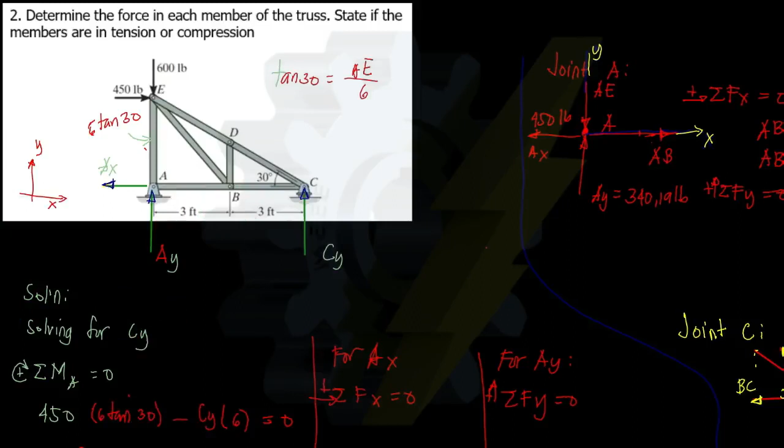So 6 tangent 30. Then next we have C sub Y, counterclockwise, so minus, C sub Y multiplied by the moment arm of 6 feet. From that, we can solve for C sub Y, which is equal to 259.81. So our direction is correct, upward.

So this is 259.81. Actually, we can now consider the joints, even without solving the reaction at point A. But if we want to make it easier to solve this joint, or member AE and AB, we can solve AX and AY by taking summation of forces vertical and horizontal, or along the X and along the Y axis.

Okay, so let us take summation of forces along X to solve AX, assuming to the right positive. So we have 450, then next we have AX, so AX is simply equal to 450 pounds. So this is 450.

Then lastly, AY, so we can solve that by simply taking summation of forces along Y. So we have AY, then minus 600, then lastly we have C sub Y upward, so plus 259.81 pounds equal to 0. So our A sub Y is equal to 340.19 pounds.

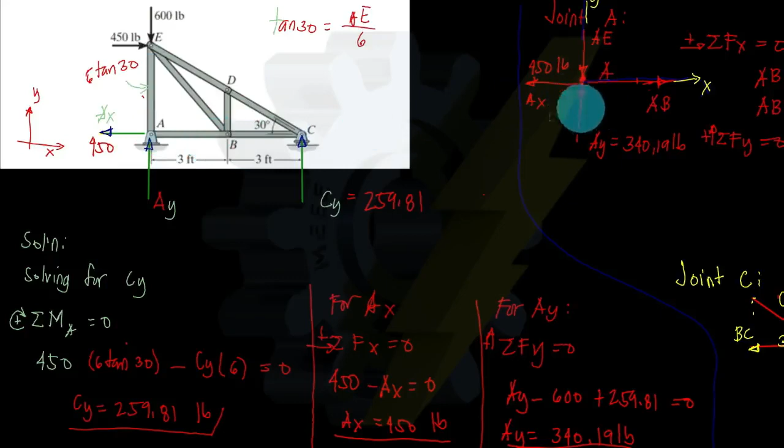Okay, so let us start with joint A. Ito yung ating FBD. So, lagyan natin yung mga AX saka AY. So, 450 saka 340.19 pounds.

Okay, so and then from that, mag-assume tayo ng direction dun sa AE. So, kung ito kanina ay upward, so therefore, ito ay assume natin na compressive. Yun yung magre-resist dun sa A sub Y. Then, last, yung AB, since ito ay may 450 pounds to the left, so i-assume natin siya na tensile. So, ito yung ating mga axis naman, yung kulay yellow.

Okay, so we can now take summation of forces vertical or along X or along Y. So, ang ano natin dito ay yung force along AB saka AE. Okay, so yung force, kung makikita ninyo, AB na lang. So, pwede rin kayo mag-denote ng ganito instead na FAB or F sub AE. So, pwede rin ganito, AB na lang saka AE.

So, summation of forces along X, dito tayo sa joint A. So, we have AB, ito, positive. Then, minus 450. Ayan, equal to 0. So, dito, masosolve natin yung AB na 450. So, away from the joint, so that is tension.

Then, next, we have summation of forces along Y. Assuming upward forces positive, so we have AY, so 340.19. Then, we have AE, or the force along AE. So, choice ninyo kung gusto yung ilagay na F sub AE or simply AE na lang. So, AE here is simply equal to 340.19 pounds. So, that is towards the joint. Therefore, this is compressive. Okay, so we are done with the forces along AB and AE.

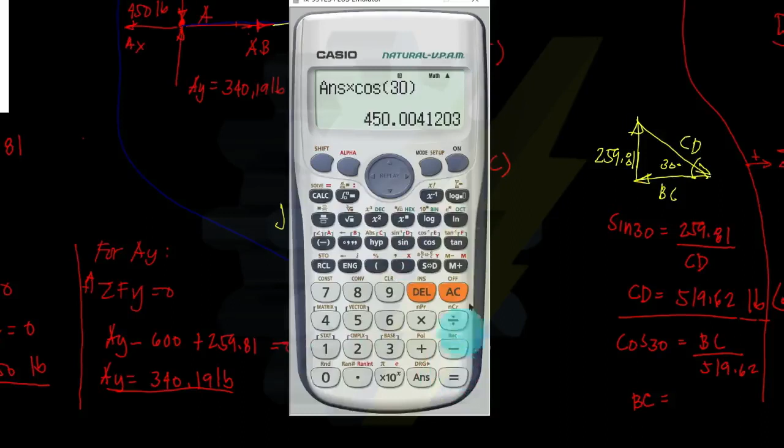Okay, pero of course, pwede rin kayong gumamit ng tangent. So, that is equal to 450 pounds. Again, yung BC away from the joint. So, that is tensile. Okay, so dito na tayo. Check natin to kung tama.

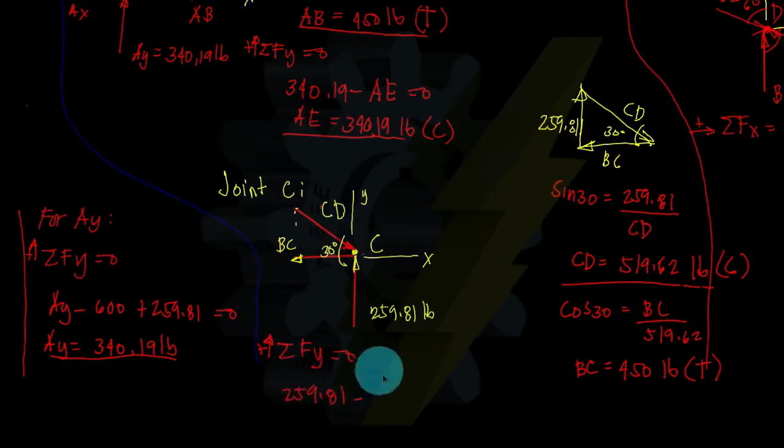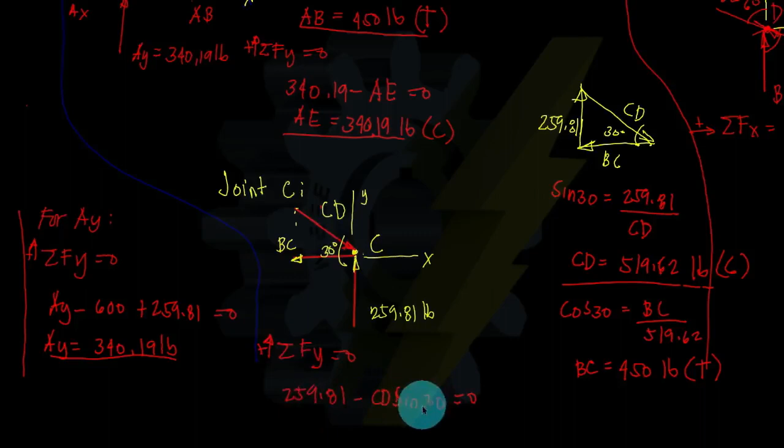So, we can take summation of forces vertical or along y equal to 0, assuming upward forces positive. So we have 259.81 minus yung component ng CD na downward. So that is CD sine 30 equal to 0. Kung mapapansin nyo to, if you will solve CD, so that is simply 259.81 divided by sine 30, which is pareho lang dito.

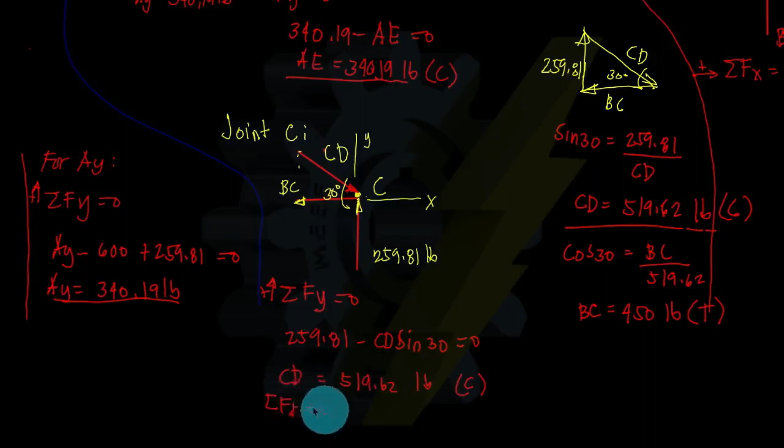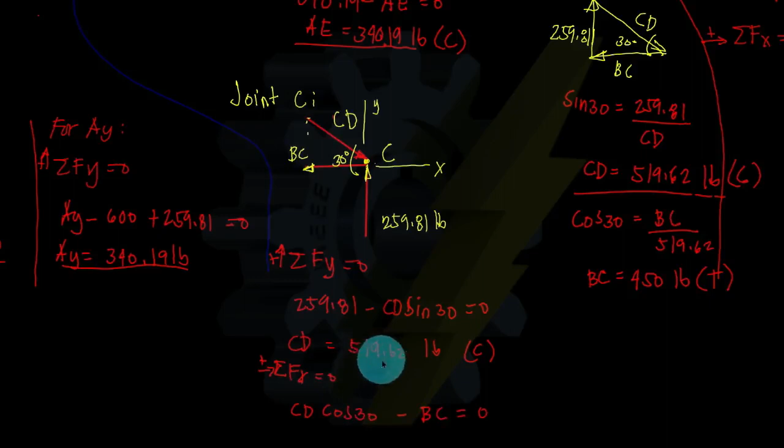So, ang CD natin dyan ay 519.62 pounds compressive. Then, if you will take summation of forces along X equal to 0, so we have yung BC, yung negative. Or unahin natin yung CD, cosine 30, yung X component nito. Then minus yung ating BC equal to 0. Yung BC natin dito, kung mapapansin ninyo, that is simply 519.62 multiplied by cosine 30. So, same lang dito. So, okay na tayo sa BC tsaka CD.

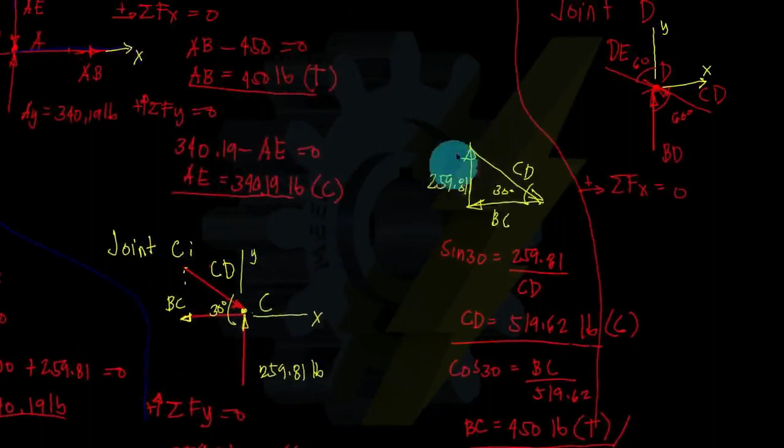So, let us now consider the other joint. So, we can proceed to joint D or joint B.